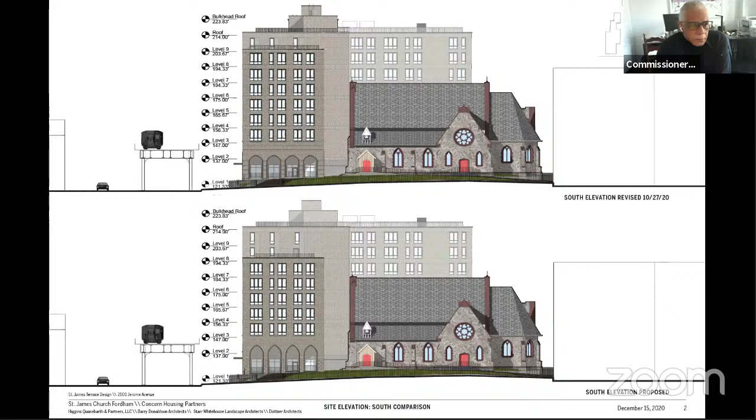Applicants have joined the hearing meeting. Please state your name for the record and you may begin. Good morning, Commissioners. Ward Dennis with Higgins Quasebarth and Partners, representing St. James Church and Concern for Independent Living, the applicants for this project.

As Corey outlined in the prior public meetings, just as a reminder, this is a project that proposes a new apartment building at the north end of the church site. The apartment building will be 50% affordable and 50% supportive housing, and the new construction will include new facilities for the church, which in effect create a campus or close at the north end of the church.

Which is entered through this arcade at the base of the building. At the last public hearing, the commissioners asked us to reduce the height of the south wing from 8 stories to 7 stories, which is what you see here, and reconsider the design and detailing of the arches for the arcade to make them more true Gothic arches. We have done both of those, and made some additional revisions and refinements, which I will take you through.

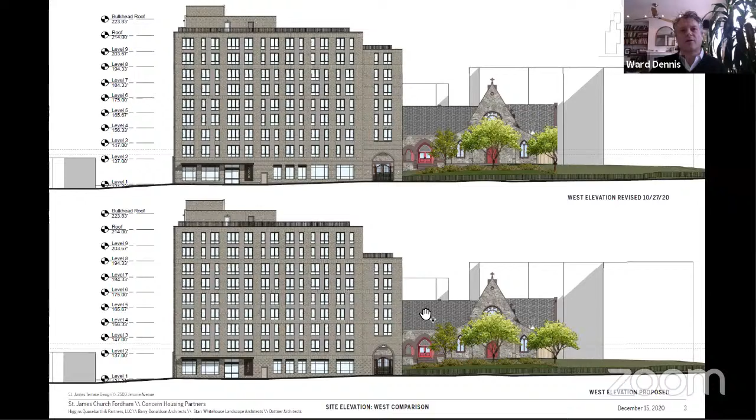You will see in a few moments that we have also revised the brick patterning at the base of the building to create a more rusticated brick pattern that ties the whole lower section of the building together. We have also brought this brick patterning around to the north elevation.

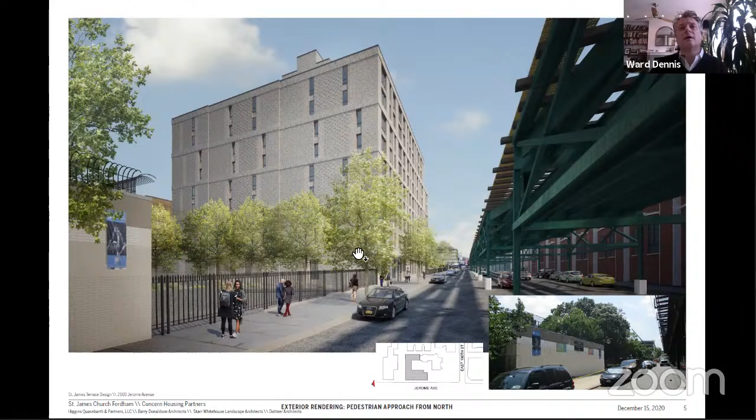Going to the new building itself, to the south wing, we have revised the Gothic arches. It is now a true Gothic arch, modeled after the arches on the church. We have also modified the proportions of the openings so they fit within the parameters of the Gothic style. This results in a slightly taller 19-foot opening and a slightly narrower 10'4" wide opening on this west elevation, this being the main entrance into that north campus or close of the church, where all of the church's social programs will be located.

We've adjusted slightly the design of the gate. This is still based on the historic gate that exists at the south entrance to the church. And as I mentioned, we have modified the brick detailing at the base of the building.

We're using these projecting header courses with gray colored brick, which creates a more rusticated pattern. And as you'll see when we get into the arcade itself, this creates a very nice relationship between the brick on the new building and the field stone in the historic buildings.

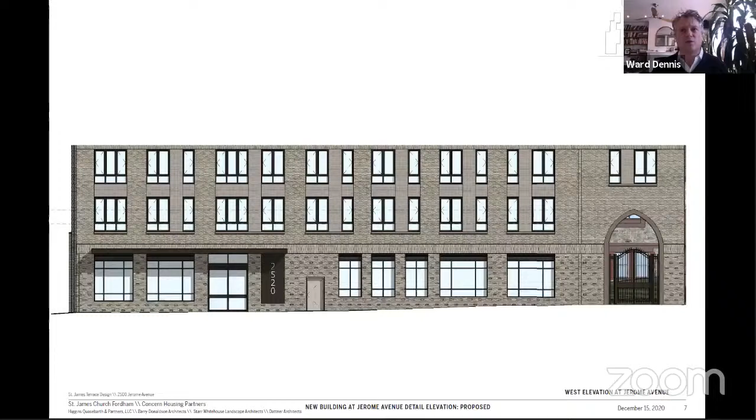We also have this three-course high soldier course of brick, which creates a water table around the base of the building. It hits the arches right at the spring of the arches. If you note here on the overall elevation on Jerome Avenue, it ties in nicely with the height of the canopy at the main entrance, so the soldier course and the rusticated brick create a unifying motif around the base of the building.

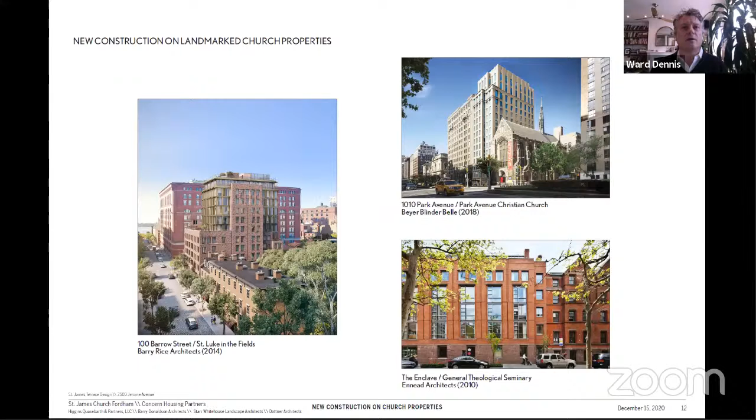This idea that the city has grown up around these older churches is something we see throughout the history of the churches, and we also see that the churches themselves are often involved in the growth of the city around them. The commission itself has embraced this idea with many of their prior approvals for new buildings next to churches throughout the city, and these are just a few examples that we had shown previously.

So in terms of appropriateness for the new building, based on the history of the church's development and the history of the city growing up around this church and around churches in general, we do believe that this project is appropriate on the architectural merits.

I'm going to take you through a series of renderings walking around the church. These are the same renderings we viewed before. We do have a before-after comparison in the appendix, but we thought it would be useful to take you through the whole sequence without breaking up before and after.

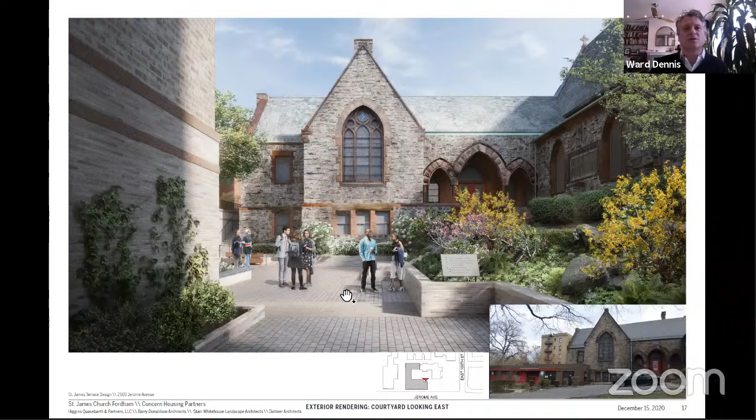And then as you come out into the courtyard, you really get this, what I think is a magical moment, where the church and the parish house reveal themselves, and you experience the overall complex of the site. You really start to see that this courtyard becomes another room of the church itself. This is a view looking east.

Straight ahead at the ground floor is the new fellowship hall of the church. To the right, that single-story building is the new community center, where the church's social programs and other programs will take place. Looking back from north to south, towards the church and parish house on the left, you still get a sense of how this becomes another room for the community, for the church,

outside the community center and the fellowship hall. Note on the center left here, the stair that separates the parish house and the community center. And just as a reminder, this corner of the parish house is currently covered over and largely demolished as part of the construction of the 1950s fellowship hall. That will be part of the restoration of the parish house that is part of this overall program.

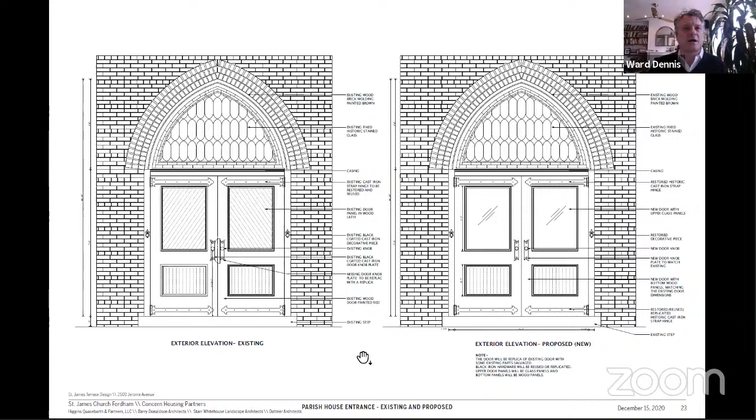All of the existing hardware on the doors will be reused. Some of the hardware is missing, and that will be replicated to match the historic as part of this project, which is really about opening up the parish house to the community. And then finally, on the stained glass windows, we propose to remove the non-historic decorative stained glass and replace it with this lozenge leaded glass that matches what's in the transom and matches what's in the other window openings on the parish house.

So that takes us through the full project. If there are questions, I'm happy to answer. We also have representatives from the architect and from the development team who can also answer questions.

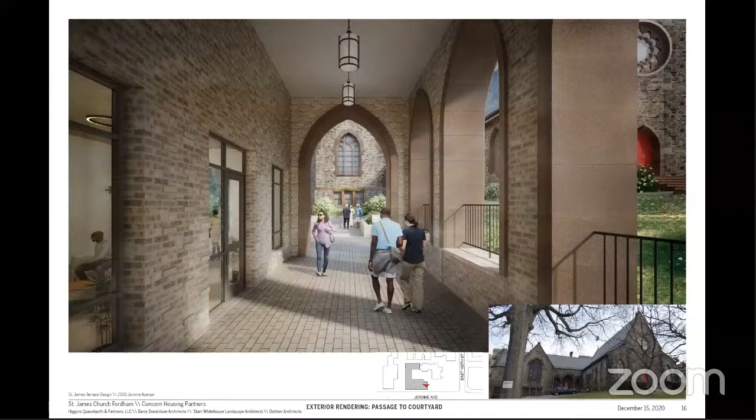Thank you. Commissioner Jefferson, I think last time you were supportive of a wing being here with arches, but you did want to see that wing returned to 7 stories. So today it has been returned to 7 stories and there have been enhancements at the base. I'm wondering how you're feeling now.

I can support this proposal for many reasons, one of them being the composition. I think it works very well, and although it's connected to the church, the church is still dominant from all views. Second, I think the circulation through the arcade is quite beautiful - it's classical and works very well. The materiality and the changes in material really tie this together in a sophisticated way, especially at the pedestrian level, and it holds it together. Finally, the repetition of elements - the arch openings - ties the base level together. So there are 4 or 5 things that are very well handled here, and lowering the building to 7 stories works very well. So I can approve it.

Okay, thank you. And Commissioner Holford-Smith, I think you were one of the commissioners who wasn't quite there yet last time. So I wanted to hear how you're feeling after these changes today.

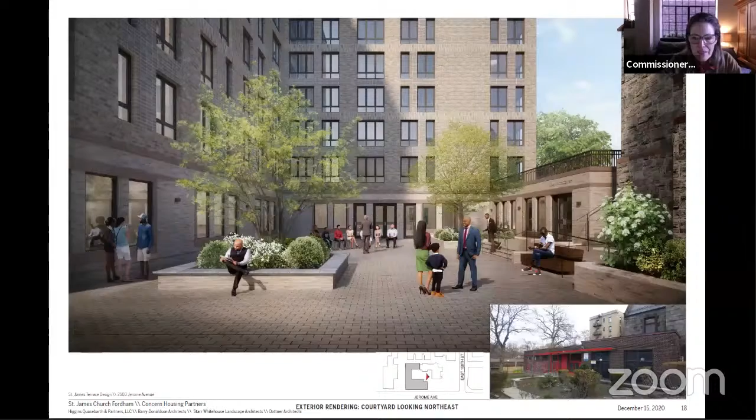That's the one on the southern side of the arcade, where there are the arched windows - I believe it was page 10. Basically the height of the windows in the drawn elevation, that one is fine, but it kind of lifts up to accommodate the slope in the ground, and I think that's a bit awkward.

I'm actually sitting here right now looking at Calvary, and there's something about the abstraction of the arches in the roof, at the penthouse level, that reminds me I think this would be more successful if it was a true sort of window - picking one of those datum lines, the higher one potentially or the lower one - allowing people passing through the arcade to read the slope against the arches or not, or to see it as a different kind of sloping condition beyond. So I think this is a bit awkward and could be resolved better, but otherwise I'm absolutely now in support of what they have proposed.

Commissioner Chen, last time you were sort of on the fence. Where you are now?

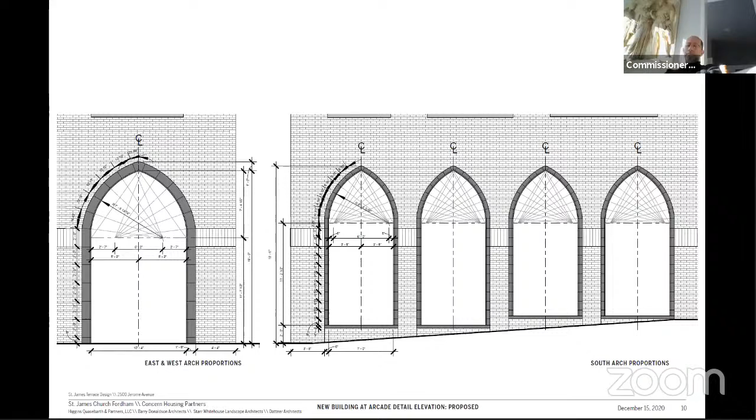Yeah, as you know, I was one of those that's struggling as well, and I agree with all the comments made this morning. I think collectively, this commission, together with the public comment and the feedback, and the applicant's modification, has vastly improved the thing.

I do agree with Commissioner Adi's comment that those windows that are not in alignment need further study. That I do agree. But in terms of detailing the proportion, I mean, it is what it is. This is a very tough site because you've got the physical constraint of a very important church building and landmark, and then to put it down in context, I can support it given the refinement.

Okay, thank you. All right, and Commissioner Goldblum, you had very strong feelings about the overlap at the parish. I'm wondering where you are now.

Yeah, thank you. I certainly agree that the demolition is appropriate. I certainly agree that the construction of a new building on this site is appropriate. I agree that the north wing has improved and its north-facing facade is appropriate. I remain opposed to the wing that blocks the parish house. I think it's standard LPC practice to try to preserve views from the street of significant portions of buildings, and I don't see why this would be any different.

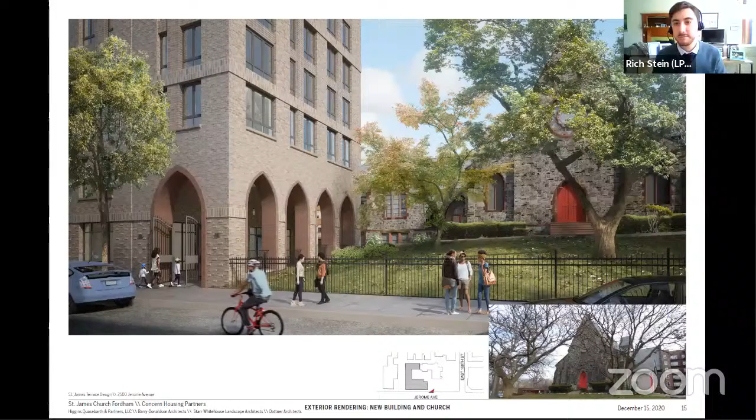Okay, so that's approved. Thank you, and thanks to everyone for participating in this robust process.

Okay, we're now going to move to public hearing items before returning to a couple of meeting items at the end of the day. So the first public hearing item is item number 1. This is LPC 20-10489, an application for a certificate of appropriateness in the Borough of Brooklyn, block 2566, lot 14, 98 Milton Street

In the Greenpoint Historic District. This is a frame house built in 1855. The application is to alter the primary facade and construct a rear yard addition. Commissioners, the applicants have joined the hearing. Please note that staff will be walking you through the components of the proposal, and the applicants are available for questions afterwards. Staff, you may begin.

Good morning, commissioners. Dena Tasse-Winter, preservation staff. There's some construction going on next door, so I apologize in advance if you can hear that. The item before you is 98 Milton Street, a frame house located between Manhattan Avenue and Franklin Street in the Greenpoint Historic District. The application is to install a portico and balustrades at the primary entrance and stoop and to construct a rear yard addition. Commissioners will note that the primary facade has been extensively altered over time and that the applicants are proposing staff level restorative work at this facade, including reintroducing clapboard siding, a cornice, multi-light windows, wood window surrounds, and so on.

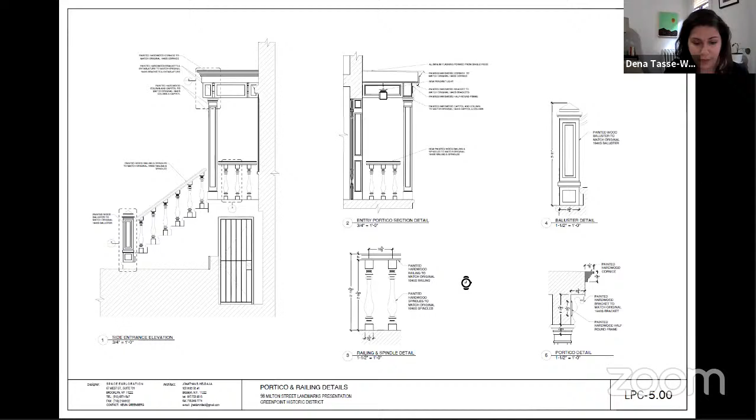These existing and proposed elevations, again, show some restorative work that will be at staff level, but I'm drawing your attention to the door surround. Here are the details for the proposed portico and railings. And this axonometric view, which is showing the proposed conditions, as well as a preview of the rear facade, which I will now review.

The proposed one-story rear yard addition is only being brought forth for your review due to the fact that fewer than 50% of buildings of a similar type along this block currently feature rear yard additions. Of the additions that are currently present, all are between 1 and 3 stories in height and project varying depths into the existing rear yard. The proposed addition at the subject premises will be 1 story in height and will have a shallower projection into the rear yard than the majority of others within this donut.

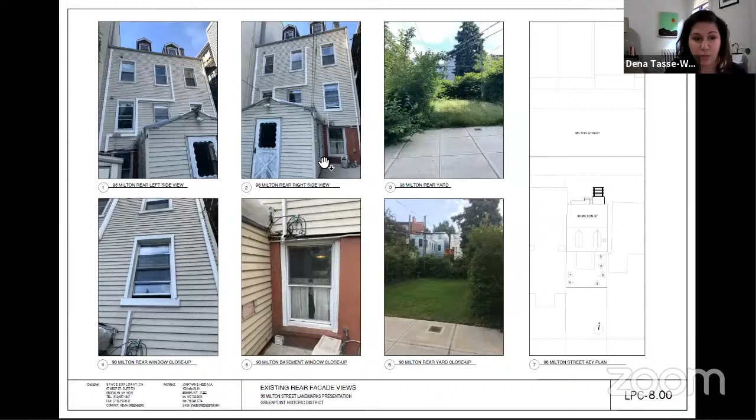Also, due to the size of the house and its placement within the lot, as you can see, the new addition will not project further than the neighboring buildings on either side. This shows the existing shed that will be removed, and the 1-story addition will be in this location. While the second floor and the pitched roof are partially visible from Noble Street, the 1-story proposed addition will not be visible from any public thoroughfare.

Here are the existing and proposed rear elevations. The addition will feature clapboard siding, metal window and door assemblies, and a terrace railing and stair. The enlarged door opening that you see above is also staff level work. And then here, just this axon showing the full scope of work and some existing and proposed views, again, showing the full scope.

So to summarize, the components before you today are the installation of the portico and balustrades at the primary facade and the construction of a 1-story rear yard addition. The applicants are here to answer any questions. Thank you.

Thank you. Nice presentation, Dena. Commissioners, do we have any questions for either Dina or the applicants? All right, I'm not seeing any questions at this time.

So why don't we see if we have any public testimony, and then we can come back to that. If you're here and would like to speak on this item, please raise your hand so we can identify you. And as always, we'll start with anyone who signed up in advance, and I'll turn it over to Lisa Kersavage to walk us through the testimony. Great, thank you, Sarah. We had 2 people sign up, and we'll start with Kelly Carroll, followed by Mark Bench. So Kelly, I've brought you in.

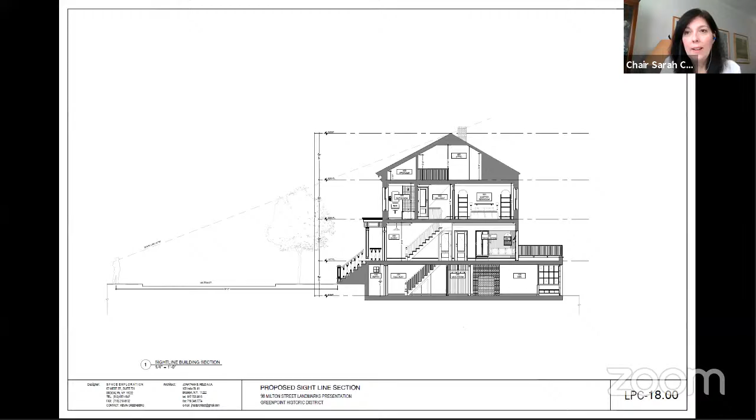So if the applicant is present, can we have them unmute? We are present, there's three of us. Okay, and we're happy to answer any questions. We're delighted to hear the testimony from the two testifiers, and we're very grateful to the commission for its attention this morning.

Great, thank you. And I just had one question. It's a very detailed question, but at the front portico, your columns are set in and the entablature sort of goes beyond it. I'm just wondering, is that typical? I imagine these being, in my memory, typically aligned with the entablature and not set in. I don't know if you thought about that detail or made that decision purposely.

I think that decision was made based on precedents we saw in the district, but we're happy to modify the proportions if the commission deems it more appropriate to do so. So did you see others where the columns were set in? I believe so. I think in the precedent images that Dina walked us through in previous pages, it looks like one of the images we included had a similar entablature relationship. There it is. I see it. 102 Milton.

Sarah, just for the record, I believe that building referenced there is one that was restored at some point in the past, not an original portico. So it may or may not be replicating authentic details in that particular case. Okay, thank you.

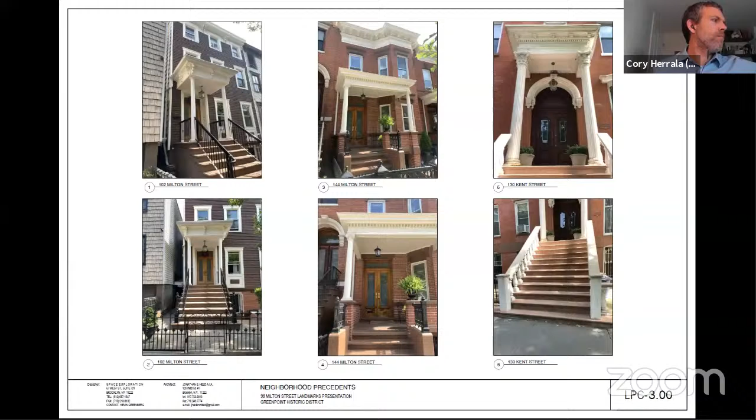Just an alignment question. If you go to your back facade elevation, you see the alignment of the second floor and the windows on the third floor, and the cluster of windows that you have don't align with the ones on the third floor. I'm just wondering why is that? Is it just because of the space inside, or is it a design issue?

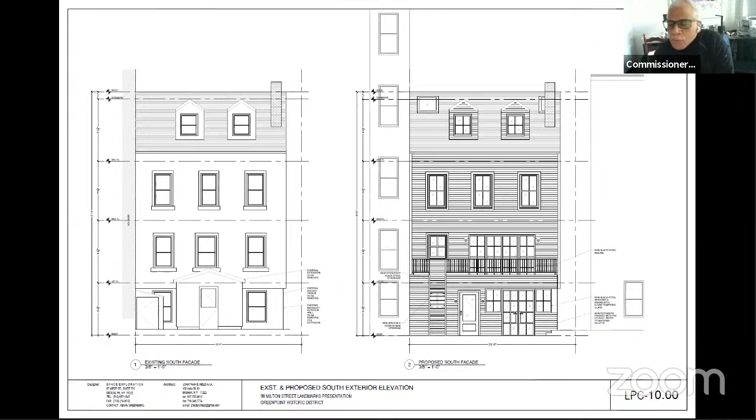You're correct, Commissioner, it's dictated by the interior layouts. Given the modest size of the interior spaces, the proportion and alignment of these two clusters of windows are driven by the interior layouts. And just confirming that the rear facade is not visible from any public way, is that correct? Correct.

All right, any other questions? Okay, I think we don't have any other questions, so I'm going to go ahead and start to unmute everybody so we can close the hearing and begin our discussion.

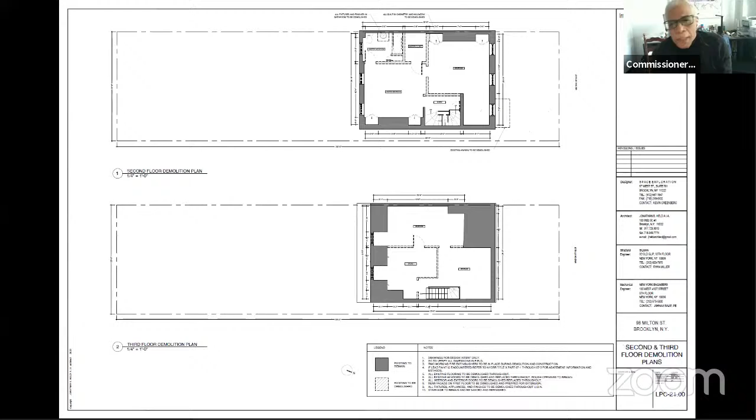Commissioner Chapin, would you make a motion to close the hearing? Motion to close the hearing. Commissioner Bland, would you second that motion? Second. All in favor, say aye. Aye. Any opposed? Okay, the hearing is closed and we'll begin our discussion.

So we have two components. One is the creation of the portico and alterations to the front entrance, and the other is the one-story rear yard addition at the rear. Commissioner Devonshire, would you like to start this one?

I will, and I think that pretty much everything is appropriate about this. I applaud the applicant for turning this building around, and I would also say that the discussion about the portico is correct, and there's probably enough information, both written and pictorial, to find an accurate historic reproduction of this. I think Corey said it well, that the one they used as an example is probably a recreation. I would say work with the staff and develop a portico that's accurate.

Commissioner Chen? Yeah, I agree with Commissioner Devonshire. This is appropriate and I can support it. Commissioner Bland? Agree, a great project actually. Just work with staff, particularly on the front entrance.

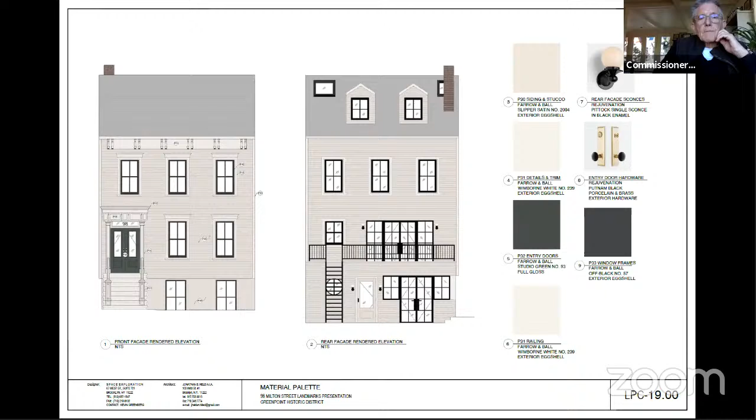Chair Carroll, Aye. Commissioner Bland, Aye. Commissioner Shamir Barron, Aye. Commissioner Chapin, Aye. Commissioner Chen, Aye. Commissioner Devonshire, Aye. Commissioner Goldblum, Aye. Commissioner Gustafson, Aye. Commissioner Jefferson, Aye. Commissioner Lutfy, Aye. Commissioner Holford Smith, Aye.

Okay, 11 in favor and none opposed. The motion carries. It's approved, and just continue to work with the staff on resolving the proportions of the portico. Thank you very much.

Thank you very much, thanks to all of the commissioners. We'll move to the next item. The next item is number 2, LPC 21-00136.

An application for a certificate of appropriateness in the Borough of Brooklyn, Block 1222, Lot 7501, 875 St. Mark's Avenue in the Crown Heights North Historic District. A Romanesque revival style row house designed by Langston and Dahlander and built circa 1891. The application is to legalize facade work and the installation of a mailbox in non-compliance with Certificate of No Effect.

16-7468. Commissioners, the applicants and staff have joined the hearing. Please note that staff will be walking through the components of the proposal, and then the applicant will explain further details. Staff, you may begin.

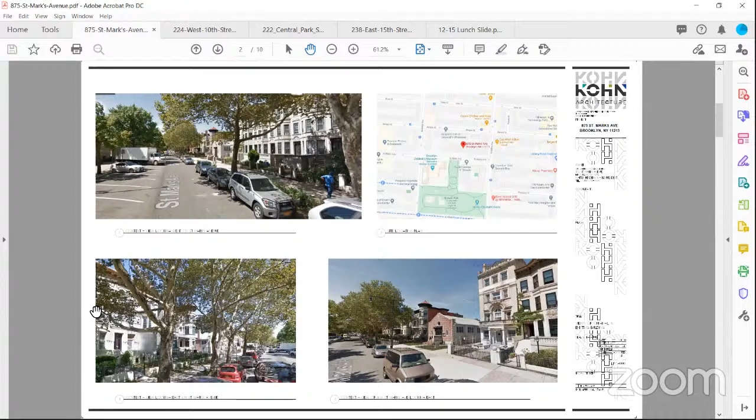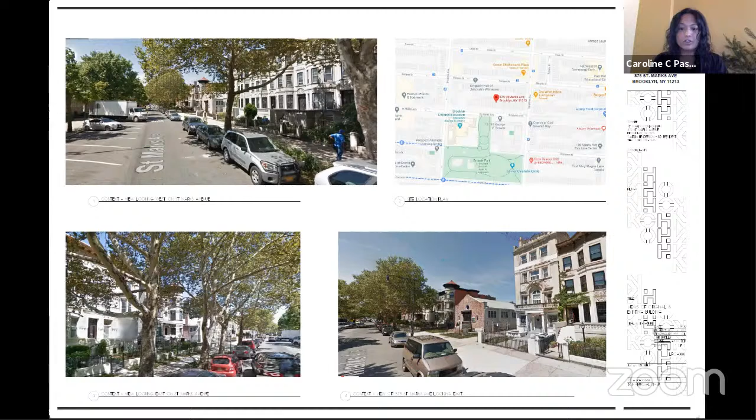So in 2014, several violations were issued against the property for work performed throughout the building without Landmarks Preservation Commission permits. This included alterations to the 3-story and 2-story projecting bays at this east facade, including the removal of the decorative pressed metal elements, pilasters, and molded panel details, cornices, and other architectural elements that were present at the time of designation. These bays were completely resurfaced in stucco.

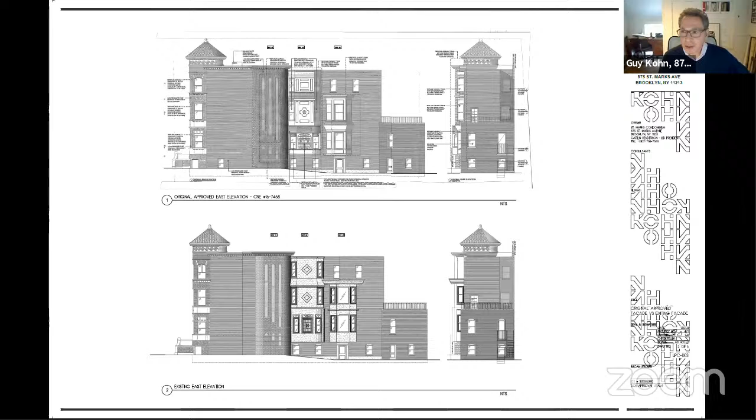We have worked with Landmarks and the staff to resolve all of the violations except for the projecting bays and mailboxes. Instead of having to destroy the existing projecting bays, which still have their same form in essence, we tried to find a solution that would work as far as disturbance to the building and their financial capabilities. The decision reached in conjunction with landmarks staff was to try and replicate the details of the bays in stucco rather than rip out what was there, rebuild them, and duplicate the materials. The other problem was we had no real good photographs of the detail work.

We were able to look at it closely, as close as I could, and I think the first bay, call it bay number 1 on your left of the screen, is very close to what we can see from the photographs that were there.

So we're asking to try and duplicate these details, including the fish scale metal roof, the framework, and some of the pilasters on the lower level. We're suggesting using fiberglass to replace the pilasters, and we believe we can duplicate most of these details with stucco. There are some lunettes we're proposing putting over the existing arched windows, and that would probably be done with wood.

On the second bay, it's very hard to see what was there originally. The cornice at the top is existing, and we're proposing keeping it there and doing the rest of the work with stucco, including the fish scale roofs, the arches, and some of the brackets underneath the sills. If I can go to the next slide, Caroline, and show the details.

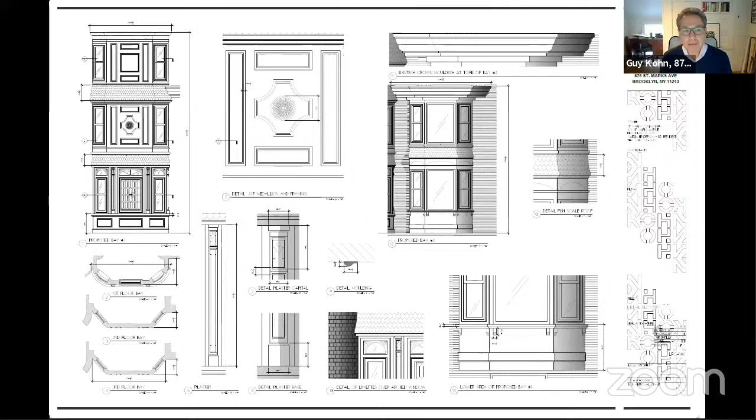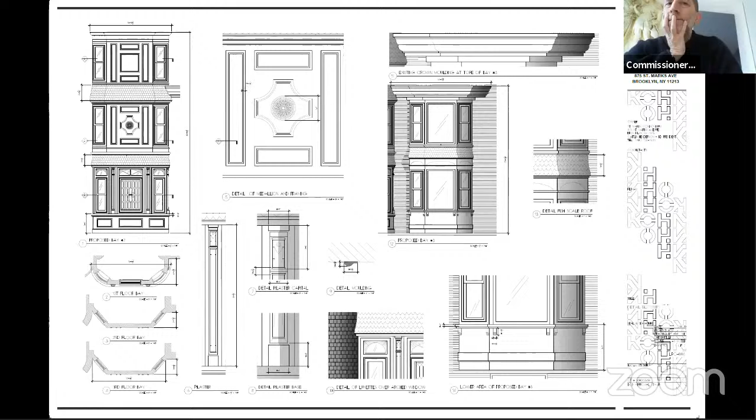Well, we were trying to make it as simple in installation as possible. There's so much stucco work on these bays that we thought it would be advantageous to have just one person, one company work on that. I think you can develop some of these forms fairly easily. I imagine this fish scale stucco to be almost like marzipan, where you layer upon layer to create that effect. The fish scale, from what I can see, is a very flat pattern, not curved or rounded like on a snake. It's laid on, almost like a baking sheet. We also felt stucco was probably the most cost effective in this particular case.

Go figure. Thank you. Any other questions? Okay, I think we might not have any other questions at this moment.

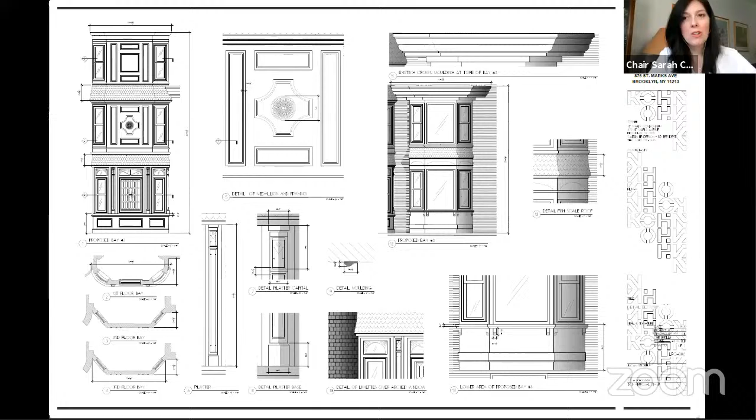So we will see if we have public testimony. If you're here in the meeting and would like to testify on this item, please raise your hand so we can identify you. Caroline, can we move back to the slide with the Zoom meeting information for the public? I'll turn it over to Lisa to see if we have any testimony. Lisa? We didn't have anybody sign up, and I don't see any hands raised. All right, okay, thank you.

Rich, do we have any written testimony? We just have a resolution from Brooklyn Community Board 8 recommending approval. Okay, thanks.

Any other final comments, Mr. Kohn, that you'd like to make before we close the hearing? I think that's about it. Thank you. Okay, all right. And commissioners, no final questions, right?

I am in the process of starting to request to unmute you all so that we can close the hearing. Commissioner Holford Smith, would you make a motion to close the hearing? Motion to close the hearing. Okay, and Commissioner Lutfy, would you second that motion? Second. Great, all in favor, say aye. Aye. Aye. Any opposed? Okay, the hearing is closed.

So we have this application before us to actually modify work that was done in non-compliance. We issued a permit for corrective work, and that work was done in non-compliance. Primarily, we issued a permit for replicating the bays in metal, but they were resurfaced in stucco. So the application today is to modify that work in non-compliance to try to replicate details in stucco, keeping it a uniform material. These bays are architectural features on a secondary facade that is seen obliquely, so that's something one can consider as well.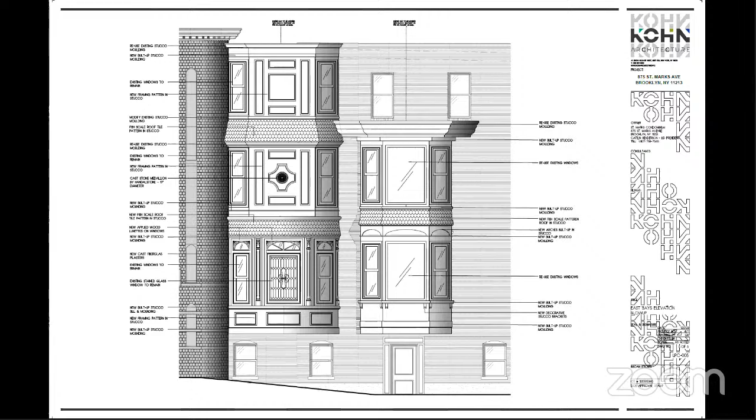Okay, Commissioner Chen. I sort of agree with Commissioner Goldblum. I think they need to work with the staff to make sure of the best material for it and follow up.

Commissioner Bland. Well, to complicate it, I'm with Devonshire on this one. I think it should go back to what was originally approved. Although I have admittedly seen some incredible stucco work on Queen Anne style newel posts in Brooklyn Heights, which surprised me. So maybe it can be done, but I think it should be metal.

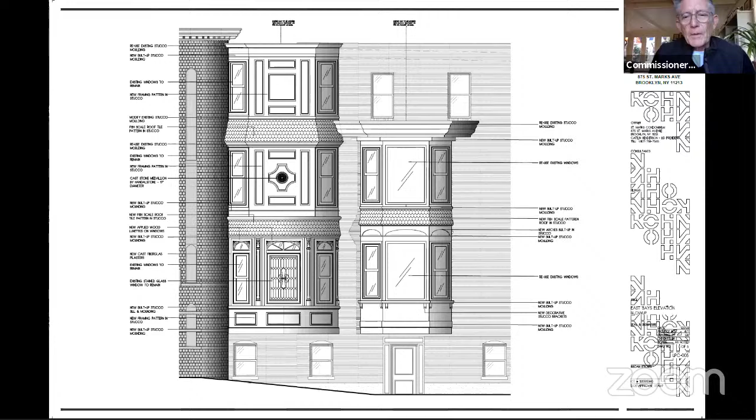Okay, and also I just remember to comment on the mailbox as well. We have to address that in the areaway. I can accept the mailbox as a freestanding item, separate from the house. Okay, and Michael, or both Michaels, do you want to quickly go back to the mailbox? I'm okay with the mailbox, Sarah. Okay, me too, same here. Okay, great. And Commissioner Lufty?

I have to say I'm concerned about the durability of the stucco, and I think metal would be my first choice. But if there's another material, possibly fiberglass, that would have more durability, I would recommend that. So no, I couldn't have this. And I'm fine with the mailbox.

And Commissioner Jefferson? I agree with Commissioner Devonshire, and I'm fine with the mailbox.

Commissioner Shamir Barron? Oh, she had to step away. Okay, Commissioner Holford Smith?

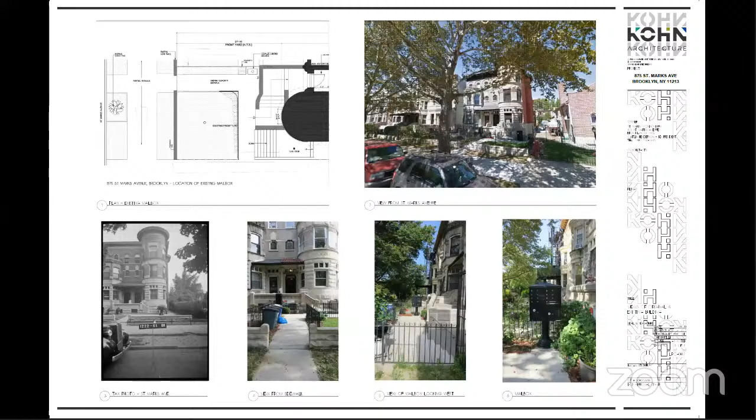And I recommend approval of the mailbox, finding that the freestanding installation of the mailbox did not damage any original or historic fabric at the areaway, that because of its location adjacent to the stoop and set far back from the street, the mailbox does not call undue attention to itself when seen in the context of this landscaped portion of the front areaway, and that the presence of the mailbox does not detract from the architectural character of the building, the streetscape, or the Crown Heights North Historic District.

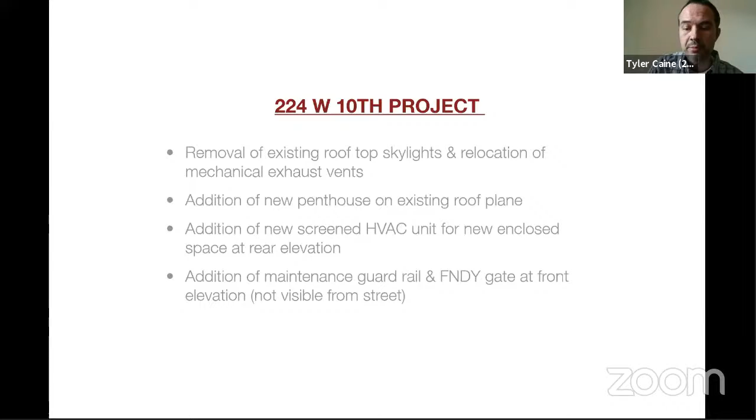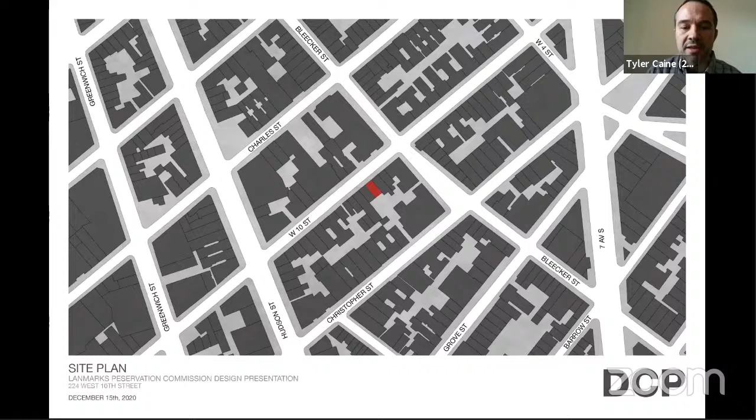Just to give you a little bit of background about the site, you can see we are located in the middle of the Greenwich Village Historic District. To zoom in a little bit to our block, we are on the north side of the block on West 10th. Between the back side of the block is Christopher Street, and this exists between Bleecker Street and Hudson on the east and west.

The site in question, this row house was built along with its neighbor in 1848. Then in 1926, there was a significant renovation done to turn this into a multifamily building that included the removal of the front stoop and the first floor entry. There were also changes to some of the windows and the addition of a fire escape. In 1969, this was included in the Greenwich Village Historic District.

Then in 2010, there was a renovation and restoration done to this townhouse. Maybe some of the commissioners here today were part of that approval, that restored the front facade and used the neighboring 226 as the guide for how to replicate the entry condition, restore the front stoop and railing, and add new windows, along with the restoration of the cornice condition.

So this is what we see here today. The brick on the front elevation is original to the building, and then most of the other details were restored as part of that 2010 renovation.

On the rear elevation, what is existing today is white painted brick. The openings on the upper stories are original to the building with replaced windows. The openings of the lower first floor and garden level of the building were expanded as part of the 2010 renovation, along with the addition of a metal rear porch and railing that goes out a few feet.

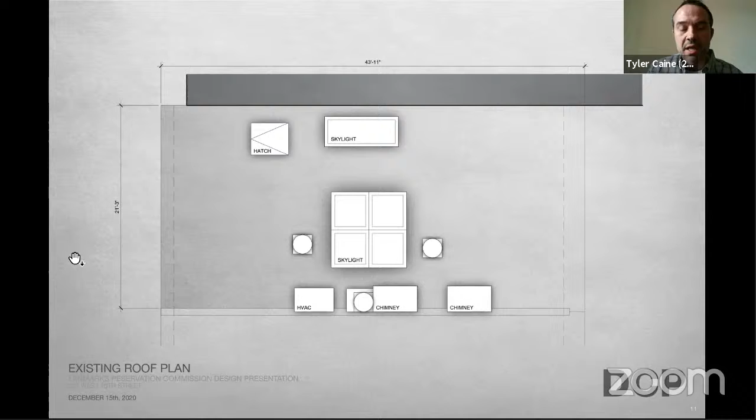So this is a roof plan of the existing condition. You can see these are the skylights and roof egress hatch that will be removed as part of this renovation. There are also two existing mechanical exhaust vents that will be relocated to accommodate the new layout. The existing chimneys and HVAC unit on the west side will remain.

This site section starts on the north side of West 10th Street, goes through our site and the existing row house. You can see it has a single sloped roof from front to back, cuts through the rear yard, and then through that incidental gap between the two buildings on Christopher Street. So there is some view through that gap to see the rear portion of what we are proposing.

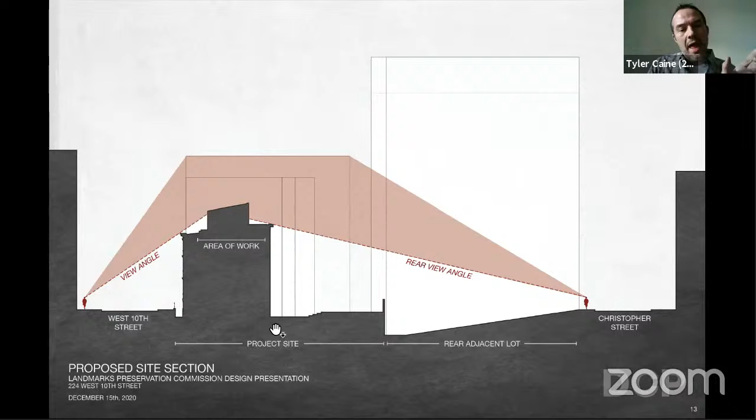The main concern, of course, is the view angle over the existing cornice that will remain of the front of our facade. So this is what we are proposing from a massing perspective. Our goal really was to try to minimize that area of visibility again from West 10th Street. And I can walk you through how and why that volume ended up in its current location.

This is a detail section of the top floor of the existing townhouse. So we can see the floor level with a staircase that is typical of the archetype. It's an open stair that goes all the way back down to the garden level floor. This is the top of the existing cornice that will remain. You have that single slope roof and then identification of that primary view angle, which is from the middle of the sidewalk on the north side of West 10th Street.

To begin, in order to provide roof access to the client for a rear terrace, there was a certain amount of overall rise that we had to accommodate. Even if we created the steepest stair that code would allow, it is a given height that leaves us at this level. The number of stairs also requires a landing. So in order to not intrude over the stair coming up below us and maintain the line of the stair opening below, we started our landing here and then went up to the roof.

Again, alignment with that opening was extremely important. We didn't want to compromise the integrity of the volumetrics on the inside of the building. So this was essentially providing us with the location for the interior face of the north wall of the penthouse addition. Combined with that is the minimum DOB allowed head height clearance on a stair in the 1968 code, which is 6'8". That was also reinforcing this location for where we would need to put the wall above and cut that floor in order to provide occupiable access to this new roof structure.

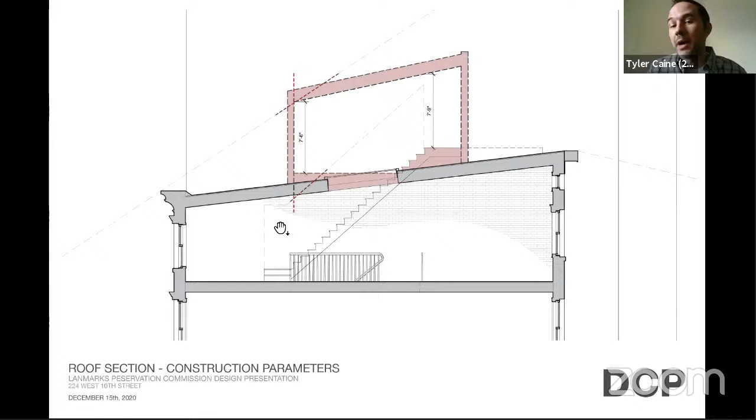Those things together were combined with two other variables. One is our ability to shrink the size of the roof structure at this location to a feasible level that could be coordinated. The other was also a DOB criteria building code for what the head height of occupiable space is, which is 7'6". So those two things together created a staircase that came all the way up to a landing even with the rear terrace and steps back down 4 steps to the occupiable space of this penthouse condition. That left us with the 7'6" height after pulling the roof structure down as much as we possibly could in order to accommodate it.

What that's left us with is about 1'8" of visibility on the front side. And I can walk you through how that visibility has taken shape.

What you see out here again is that guardrail with FDNY maintenance protective rail. And this is the line of the terrace in the rear. We are trying to keep as many of these existing rafters as possible because they were replaced as part of the 2010 renovation. So they are new metal C-joists that are pocketed into the brick on both sides.

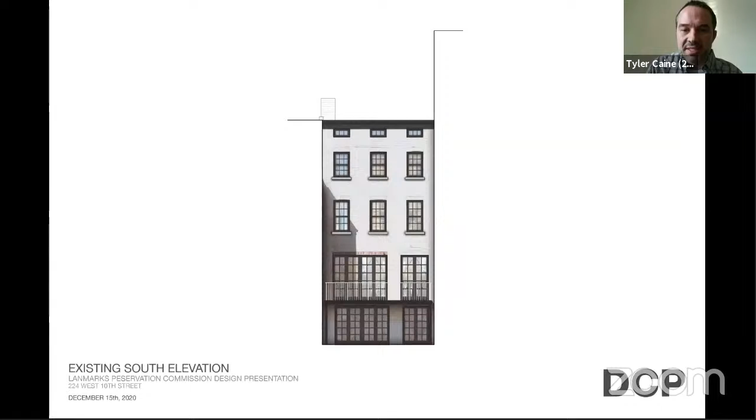Similarly, to look at the back condition, this is the existing, and then our proposed would match the white painted brick that is on the rest of the elevation on just this rear facade. We're also replicating the black painted metal handrail that was installed as part of the 2010 renovation on the porch, and we are employing the same door manufacturer for the blackened steel folded door system that constructed the doors as part of the 2010 renovation.

You will see just on the left a small wood screen that would screen the mechanical HVAC unit that's on this side. That HVAC unit is really just to provide tempered air for this new space.

So to walk you through the mock-up that we have installed, I would point out that we constructed a mock-up, and then once the mock-up was constructed, we looked for ways to continue to reduce visibility. Among them was working with a structural engineer to slim down the front construction of the north wall only from a 2x6 to a heavy gauge 2x4 stud, and that bought us 2 more inches. So we reconstructed the front of the mock-up to move that back, which I think did even continue to help on visibility.

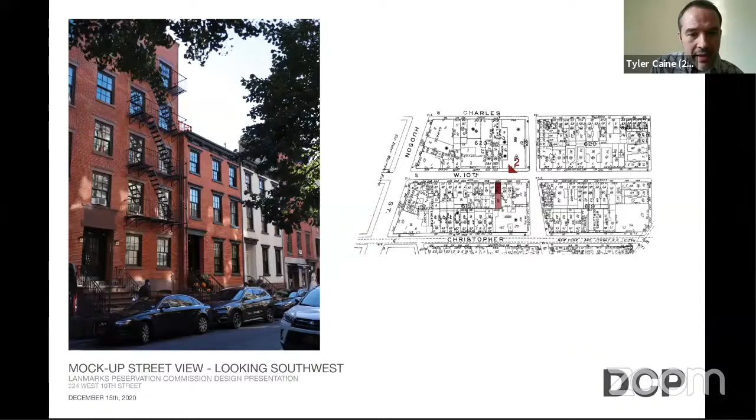Moving to the front elevation, there is that strip of 1 foot 8 inches that goes across the front of the elevation, and as we continue to move down, that strip of visibility remains relatively constant. Then as we move down towards the police station, there is one more sliver of view before we get eclipsed by the taller building to the east of us and associated tree cover. There is no visibility from the corner on Hudson Street.

To walk through the materiality of the whole composition, as you can see, most of the materials here are already existing. On the front elevation, the existing front brick, the black multi-light windows, the black painted wood trim, and the existing brownstone are all existing to remain. We are not proposing any alterations to the historic and designated facade.

What we are adding on top is that staggered standing seam patinated zinc material, along with the blackened steel of that window that would provide access for maintenance.

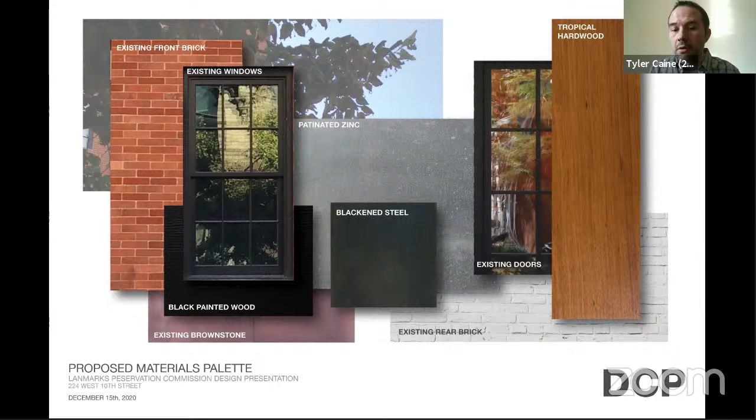Similarly, on the rear elevation, the existing white painted rear brick would be replicated on the rear face of our addition, as well as the material and manufacturer of the existing doors would be replicated for the terrace doors at the top. The only location of this tropical hardwood would be the screening of that mechanical unit, and we would allow that to weather over time, so it should provide a gray tone that would complement the rest of the relatively neutral tones.

Just to end, I thought I would walk around some other aspects of the district, which I think ground our project. I'm not going to go through all of these, but I think there are numerous examples of a small, minimally visible addition onto similar massings of 3 to 5 story row houses around the district.

Just to touch on some of them briefly, there's one on 11th Street. We see a rooftop structure that provides similar amounts of visibility to, I think, what we are ultimately proposing.

A better example might be just next door on 11th Street. Even though this is a double wide row house and ours is a single wide, the composition and materiality is very similar. And I took something just from the designation, or the certificate of appropriateness back in 2017, that said the modifications to and expansion of the rooftop addition will not eliminate any significant architectural features of the building.

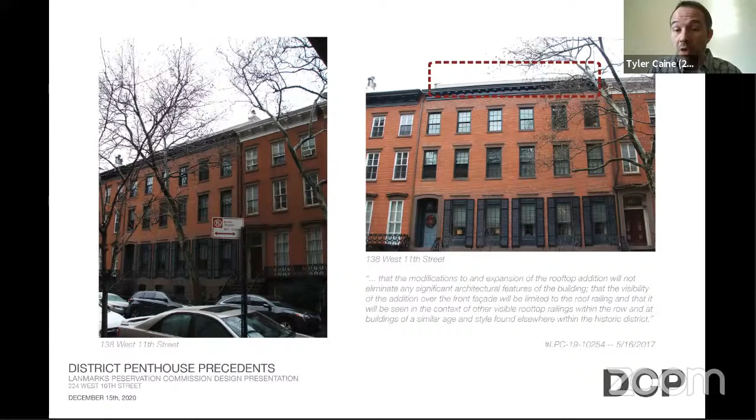I think that's really what we are also trying to do. I don't think anything that we are proposing is compromising the integrity of the base row house condition on the front. And then the last example is actually one block up from us on Charles Street.

They chose what appears to be a patinated copper, whereas ours would be a smaller scale patinated zinc. But I think this again speaks to what our goals are in trying to situate this within the district and accommodate the penthouse with minimal intrusion. And this is kind of just one block away.

That was it. Thanks again for letting me share the project, and I'm happy to answer any questions that anyone might have with the proposal. Thank you. Thank you. All right, commissioners, do we have any questions?

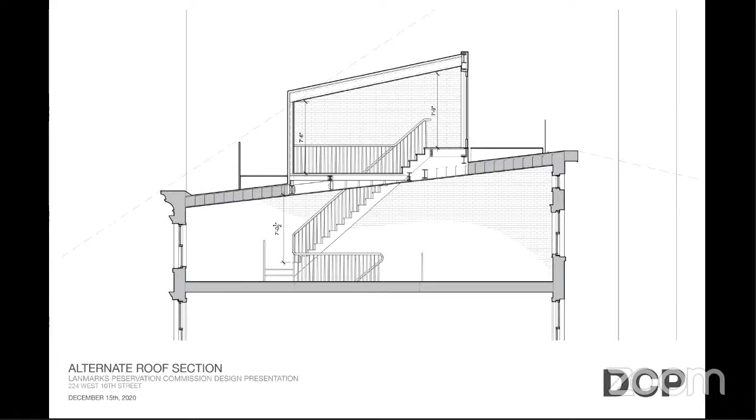Thank you. And just a follow-up question to that, because I think you showed really very clearly why you were sort of limited to this footprint, and that you have these minimum floor to ceiling heights in order to meet the landing points that you would create at the roof, given this very steeply pitched existing roof.

We've seen some applications where the addition has sort of been dropped down into the floor below to help get it out of the sight line. I don't know whether you considered that, or whether there just isn't enough room in the floor below to accommodate it. Exactly, I think we run into the problem of the head height issue. When you turn up this landing and begin to go, it really set that height in terms of coming back up, and also the continuation of the roof plane was something that both us and the client really wanted to try to maintain. So we squished down that structure, doing pretty much everything we could to sink the upper roof down into the addition as much as possible.

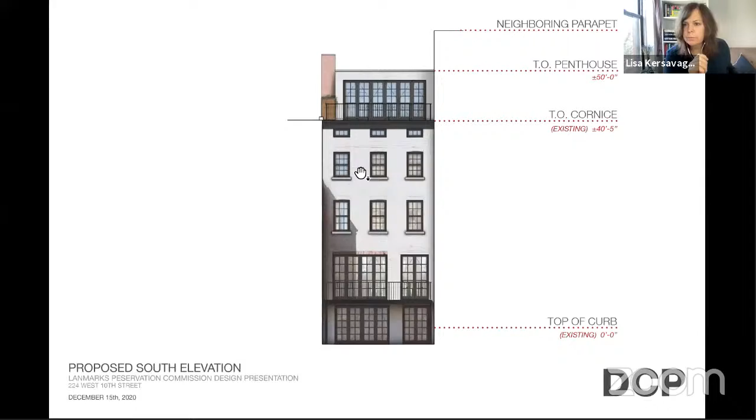Our committee reviewed this application, and some felt that the visibility of the rooftop addition from both the West 10th Street side and Christopher Street was a bit too great. They agreed with Community Board 2 that further effort should be made to reduce that visibility through modifications to the roof design and/or adjusting the roof angle.

I don't see any other hands raised. Did we receive any written testimony? We did receive that resolution from Manhattan Community Board 2 recommending approval, but to limit the visibility from the north.

So Mr. Kane, would you like to respond to that or speak a little bit more about the conversation at the community board? Certainly, I think we did bring up the conversation. The hesitation on our side is that the occupiable space in this addition is only 11'2". So modification to the front side of the roof below 7'6" would be removing anything that came below that as occupiable and usable space on the front side. Given the small amount of space we're working with to stick within this footprint, it seemed like removing 10 to 15% of the usable area was something we would like to avoid if possible.

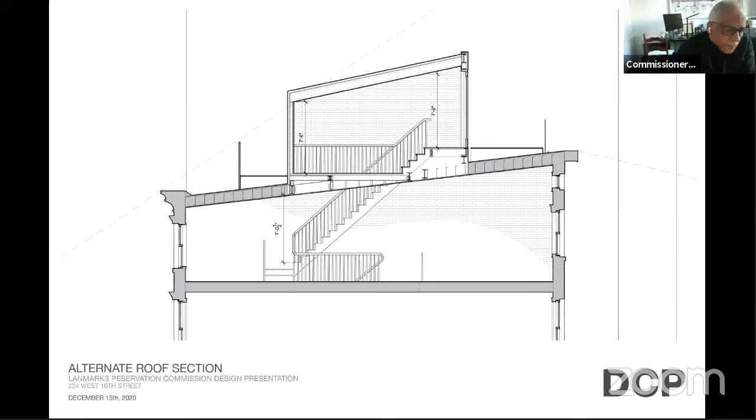Yeah, I had a question about the placement of the stair. From how you described it, there was a desire not to impinge on the existing opening for the existing stair, but you could in fact push the stair further—impinge on that opening slightly to push the addition so it was not visible from the street. Yes, I think push it back, basically. You mean towards the rear of the building? The rear of the building, yeah. I think we would only be limited by making sure we have the same degree of head clearance for the stair coming up underneath it.

Okay, thank you. Sure, okay. Other questions? Okay, not seeing any other questions.

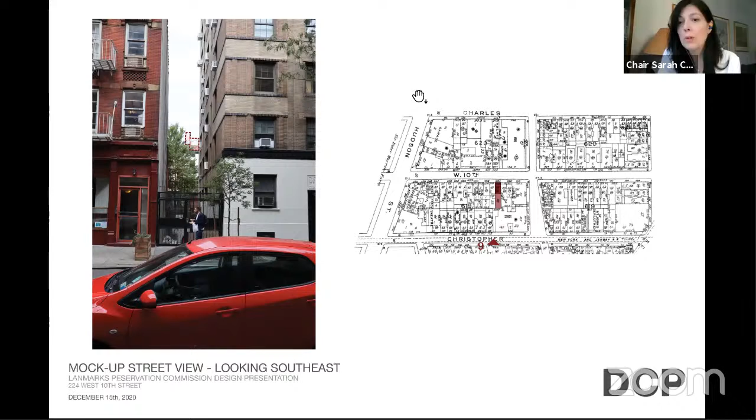I think we will move to close the hearing and begin our discussion. So I am now sending a request to unmute you all, please accept that. Commissioner Bland, would you make a motion to close the hearing? So moved. Commissioner Chapin, would you second that? Second. All in favor, say aye. Aye, aye. Any opposed? Okay, hearing is closed and we'll begin the discussion.

And Commissioner Holford Smith, would you like to begin this one? Sure. I think just given the scale of these, well, in this house, but two in a row, just having this little bit of visibility is distracting. So I think the applicant should try to do what they can to minimize that view. I think an addition could be approvable, but I'd like to see less of it from over the main facade. Okay, thanks.

Commissioner Goldblum? I was just scrolling to see something. Yeah, this is something of a self-imposed problem. I think they have been very scrupulous in trying to make their box as small as it could be. But in the end, if the terrace at the back—if you go to page 23 of 49, I guess it is, page 22 in their presentation—if you made the back terrace, instead of 7'11", made that 5 feet, and maybe had your front terrace be where you put your table, you could slide the whole thing. And this isn't about the stair—the stair need not be visible. If the stair had a sloping roof that followed the line of the diagram they showed a few pages up, the stair bulkhead itself would not be visible. Visibility is in the room created next to the stair. Yes, they've tried their best to hide it, but with some minor adjustments, this could be not visible, and therefore they should make those gestures to make it not visible. Okay, thank you. Commissioner Chapin, I skipped you, so why don't you go ahead?

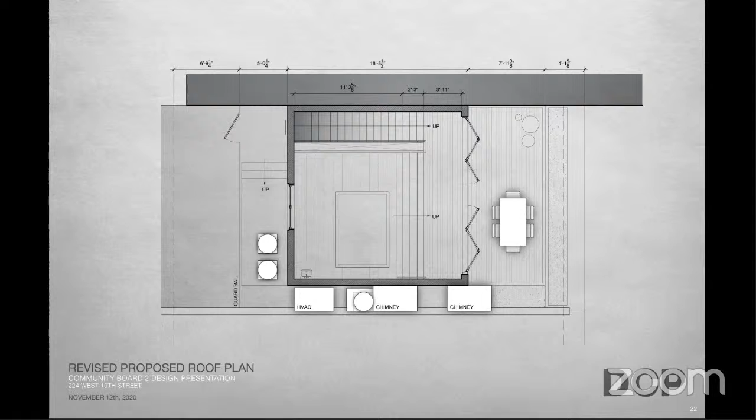I think I agree with the previous comments. The proposal is fine in general, but the visibility over the front facade is really not something we would normally approve. So they really need to work to diminish that.

Thank you, Commissioner Devonshire. I think it needs to be less visible when they've been given two ideas for doing that, and should follow through with that. Commissioner Chen?

I agree with the comments. Commissioner Bland? Agree, less visible. Commissioner Lutfy? I agree that they need to work on the visibility. Commissioner Jefferson? I agree with my fellow commissioners. Commissioner Gustafsson? Agreed. Commissioner Shamir-Baron? I agree, less visibility. Thank you.

I think everybody agrees that there could be a couple of things one could do to reduce the visibility, primarily over the front facade. So Commissioner Holford-Smith, would you make that motion?

Yes. In the matter of LPC 21-01582, 224 West 10th Street in the Greenwich Village Historic District, a Greek Revival style row house built in 1847-48. The application is to construct a rooftop addition. I recommend approval with modifications, finding that the proposed work will not damage or eliminate any significant architectural features, that the rooftop addition will be minimally visible from the west and from a gap in the street wall over the rear facade and at a distance from oblique angles, in the context of other rooftop accretions and secondary facades.

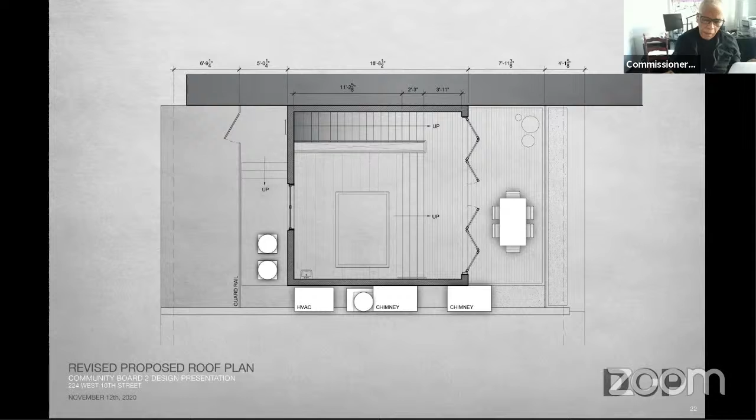However, I found that the addition and railing will be unnecessarily visible over the primary facade when viewed from directly across the street. Therefore, I recommend that the addition be restudied to eliminate visibility from across the street and directly over the primary facade.

Commissioner Goldblum, would you second that motion? I second the motion. Okay, and Rich, will you call the vote?

Chair Carroll, yes. Commissioner Bland, aye. Commissioner Shamir-Baron, aye. Commissioner Chapin, aye. Commissioner Chen, aye. Commissioner Devonshire, aye. Commissioner Goldblum, aye. Commissioner Gustafsson, aye. Commissioner Jefferson, aye. Commissioner Lutfy, aye. Commissioner Holford Smith, aye. Okay, 11 in favor and none opposed.

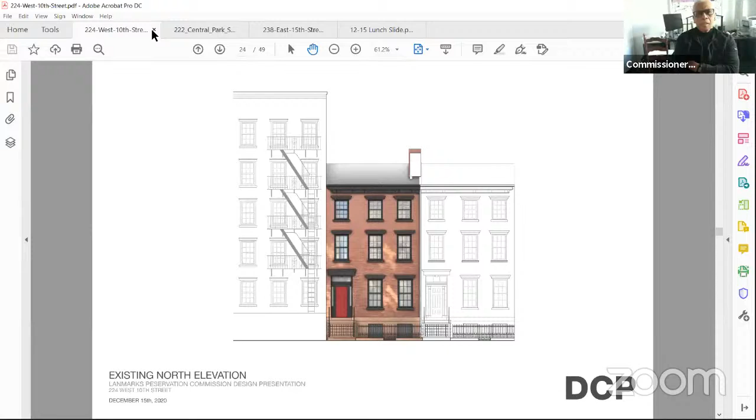The motion carries, that's approved with modifications. Please continue to work with the staff, and we'll move to the next item. Thank you very much. Okay, the next item is number 4, LPC 20-05605.

An application for a certificate of appropriateness for Manhattan Block 1030, Lot 46, 222 Central Park South, the Gainsborough Studios individual landmark. This is an artist cooperative housing building designed by Charles W. Buckham and built in 1907 to 08. The application is to replace windows.

Commissioners, the applicants and staff have joined the hearing. Please note that staff will be walking you through this proposal and the applicants are available for questions. Staff, you may begin.

Good morning, Commissioners. Elizabeth Diker, Preservation Staff. The individually landmarked 222 Central Park South features a variety of window types at the primary facade, including these large steel casement window assemblies that we see two at each floor. Many of these have been replaced or altered over time, as we can see in these elevations, noting the historic window configurations on the left and the existing window configurations on the right. Some of the historic steel casement windows do still exist at the upper floors, the details of which have been studied as part of this proposal.

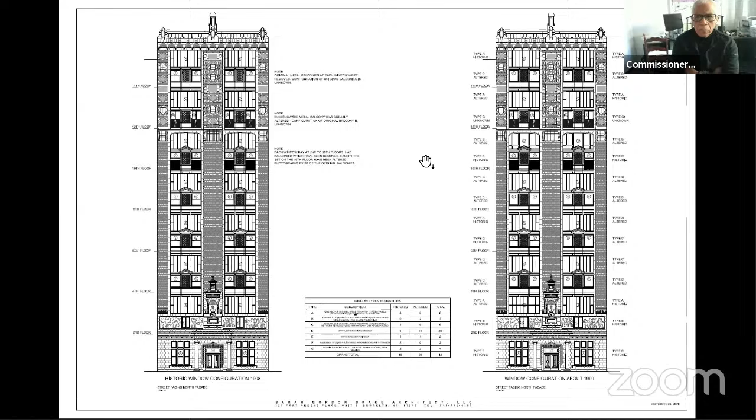The applicant team for 222 Central Park South is seeking approval for the installation of one new steel window assembly at the 4th floor that will match the original and historic steel windows in terms of material, configuration, and finish, with a slight adjustment in operation.

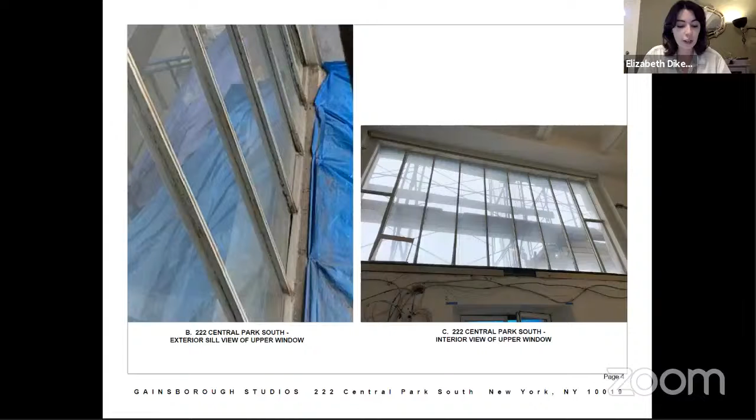Here we can see the existing conditions of the primary facade and the steel casement window to be replaced. Here we can see the interior of the 4th floor casement window and a detailed view of the exterior sill and window framing, along with more detailed photographs of the window framing.

Now we're going to get into the details of the existing and proposed windows. The proposed replacement windows feature a 3% loss of glazing from the historic.

Now we have the existing and proposed steel casement window elevations. While the historic windows feature double hung outer leaves at the ends, the applicants are proposing to change the operation of these units to outswing casement.

To mimic the meeting rail of the double hung window units, the applicants have added a horizontal muntin. In these final slides, we can see comparative existing and proposed sections and details.

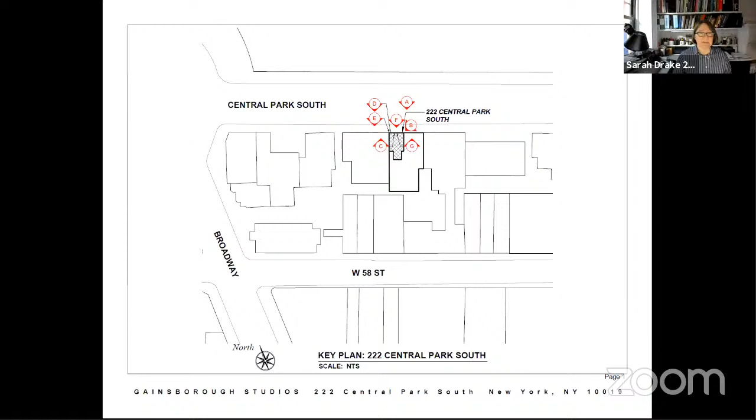And in terms of the suggestion to create a master plan, the building has agreed to develop it further, and this solution will be used anywhere else in the building where they change these windows.

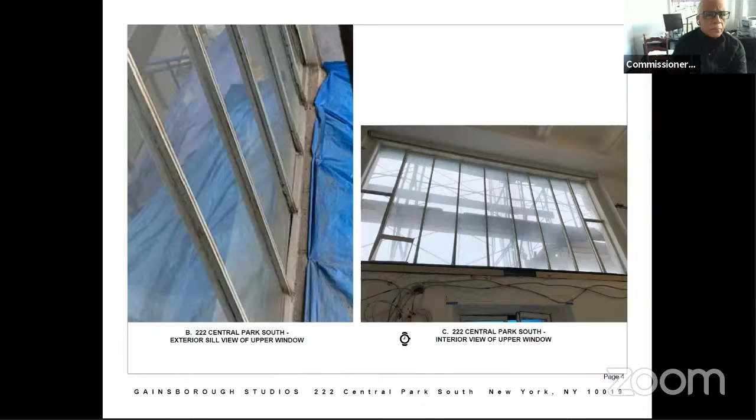I think this is acceptable because it is almost like the existing, enough that from the ground floor we really wouldn't perceive it. And...

Just to clarify, Commissioner, the additional muntin is actually in the base of that one narrow element. Well, there is a muntin where the meeting rail would be, and I think Corey, do you want to elaborate on that, or should we go to the section detail? Move us to the section.

Yeah, if we can go to the section, that's better. But essentially, those two outer panels are currently very narrow double hung sashes within the larger assembly that's otherwise fixed sashes. Because they're unable to find a way to replicate that double hung operation, the applicant's proposing to do it as a full height operable casement, but to add that mullion at the same alignment of where the double hung sashes and meeting rails were, so that its appearance will be somewhat similar, particularly when seen from the street level, although it won't have that change in plane that the double hung windows did.

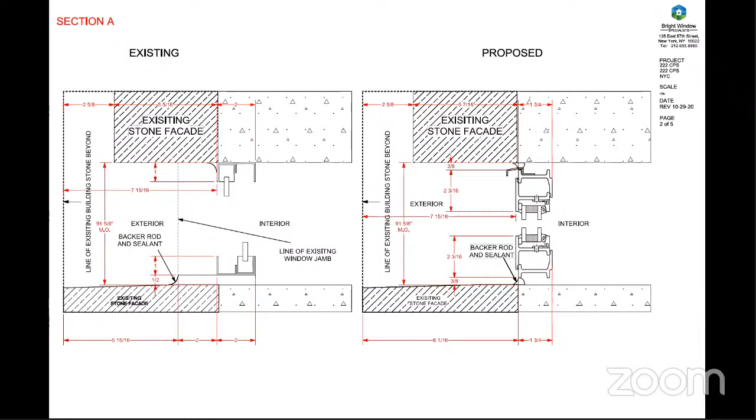And Commissioner Chapin? Yes, I agree. I think that I can support this application as presented. I note that I was going to forget to ask about this, but they did establish a master plan for the rear facade earlier, and I was just curious as to what that was. If the staff could just explain that. But I think this seems like a reasonable approach.

Okay, thank you. So I think the rear facade is not visible and may have been a different window configuration altogether, and the staff can correct me if I'm wrong on that. But I do believe that independent of this application, the building board is considering a master plan, and we may see that in the future. It seems that since they did it in the back, they will probably follow through, which is good. Exactly. So I think they're working on the front.

Okay, Commissioner Goldblum? I agree. Okay, Commissioner Devonshire? I can approve it. Commissioner Chen? Same here. Commissioner Bland? Yes, this is appropriate. Commissioner Lutfy? And I also would encourage the building to do a master plan. And this is a good case study, so. Okay, great. And Commissioner Jefferson? I can approve it. Okay, and sorry, Commissioner Gustafsson, that you were the last, but you can bring it home now. It's appropriate. Thank you. Wow.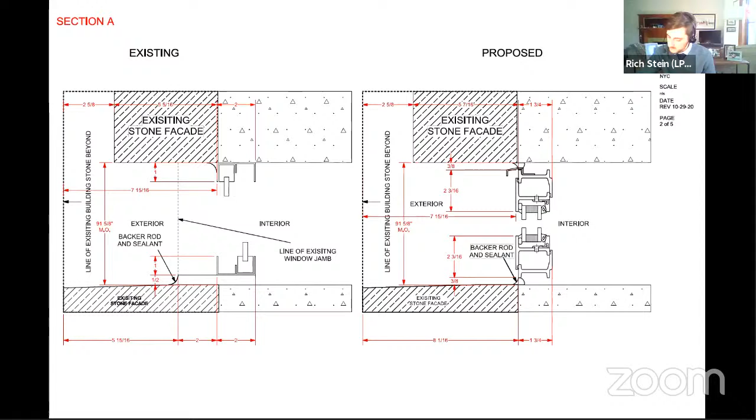Chair Carroll, Aye. Commissioner Bland, Aye. Commissioner Shamir-Baron, Aye. Commissioner Chapin, Aye. Commissioner Chen, Aye. Commissioner Devonshire, Aye. Commissioner Goldblum, Aye. Commissioner Gustafson, Aye. Commissioner Jefferson, Aye. Commissioner Lutfi, Aye. And Commissioner Holford-Smith, Aye. Okay, 11 in favor and unopposed. The motion carries. Okay, so that's approved.

Thank you. And we'll move to the next item. All right, the next item before we break for the lunch break is item number 5. This is LPC 19-4844, an application for a certificate of appropriateness in the Borough of Manhattan, Block 896, Lot 30, 238 East 15th Street in the Stuyvesant Square Historic District. This is an Italianate style house built in 1850, and the application is to construct a rooftop addition and excavate the cellar.

Commissioners, the applicants have joined the hearing. Just giving control of the slides to them.

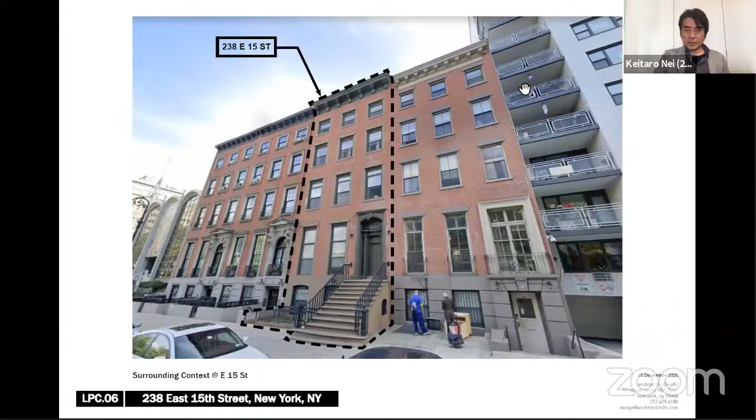Basically, it's 2 rectangular masses clad in zinc. This is the rear facade.

On the rear, we're proposing to excavate partially about 6 feet down a portion of the rear yard, to meet with the cellar space inside.

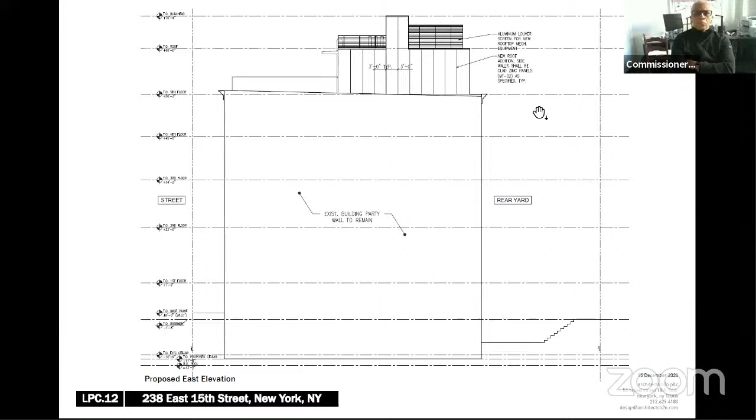In the cellar, we're proposing to excavate the entire cellar down 1 foot, and then we'll have a narrow lap pool excavated another 4 feet. This is the rear yard excavation here.

We're also proposing an elevator pit approximately 4 to 5 feet deep, and this will be the new proposed elevator shaft.

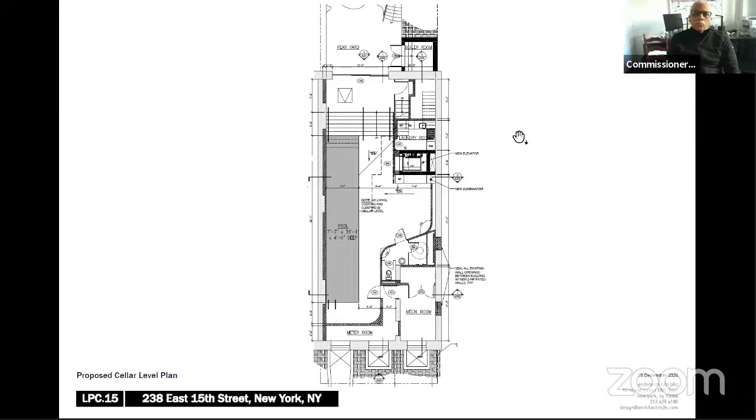And this is the elevator pit that we will be proposing here where the elevator is. Next slide. And this is the rear yard.

There are double height sliding doors that connect the cellar inside to the exterior. This is the area that we propose to excavate, and the excavation is only about 6 feet down, so it's not like a full story.

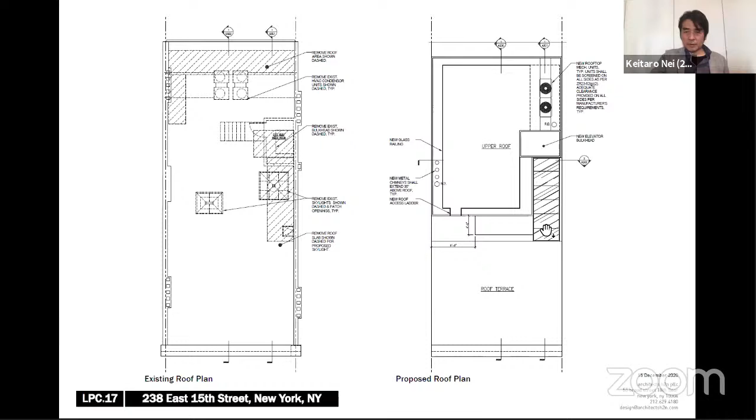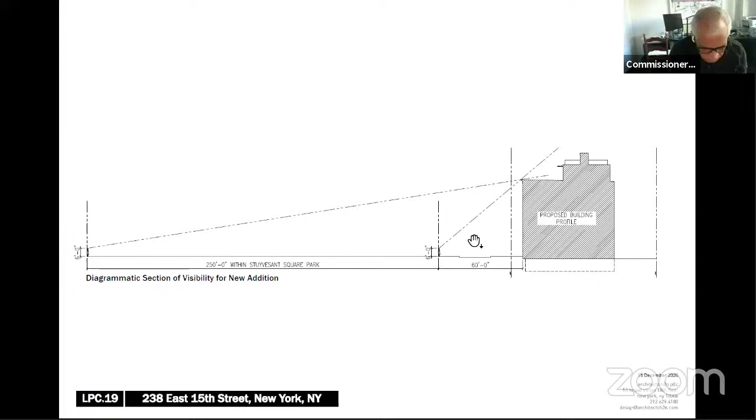This is a section showing the visibility angles. From across the street, our addition is not viewable. However, because of the Stuyvesant Square Park, we will be able to see the roof addition at certain vantage points, and we can go into that a little bit more with our mock-up.

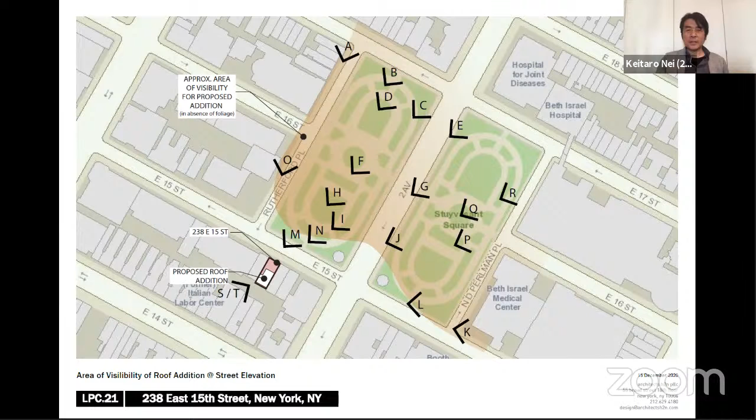This is a visibility diagram. This is our building here. For this diagram, we're going to assume a hypothetical condition that there are no trees in the park. And if there were no trees, this is what we feel would be visible.

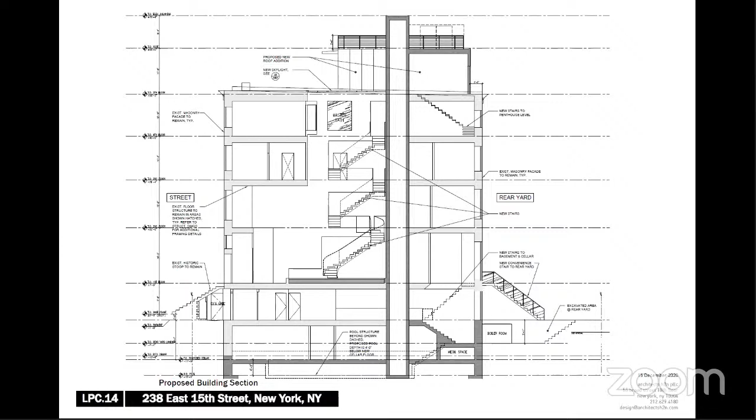So the elevator goes to the new roof penthouse, right? Yes, it will go to the addition, the roof addition, but it won't go to the roof of the roof addition. And this is a single family house, right? Yes, correct. Okay, and what is the interior height of the rooftop addition?

The interior height will vary. It's stepped a little bit, but it's somewhere between 9'4" and 10'4". Thank you.

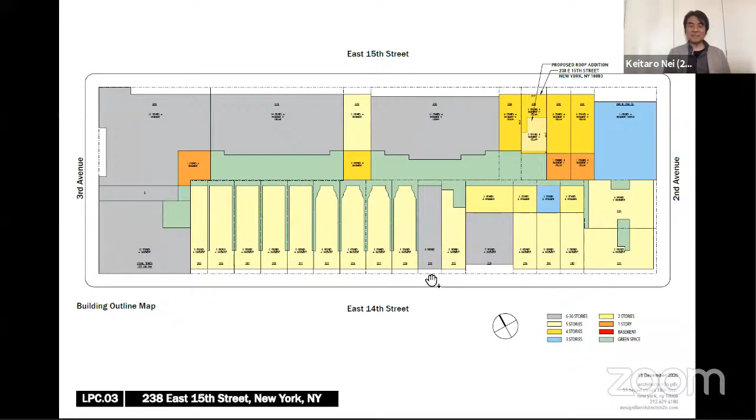So in reality, as one walks through the park, especially with a very mute color palette and very simple form, we don't think people will really notice it - that's our feeling. And I think as the views get closer to the building and really connect with it visually, you're seeing the bulkhead, the elevator bulkhead, more than the addition. Is that right? That's correct.

All right, any final questions, commissioners?

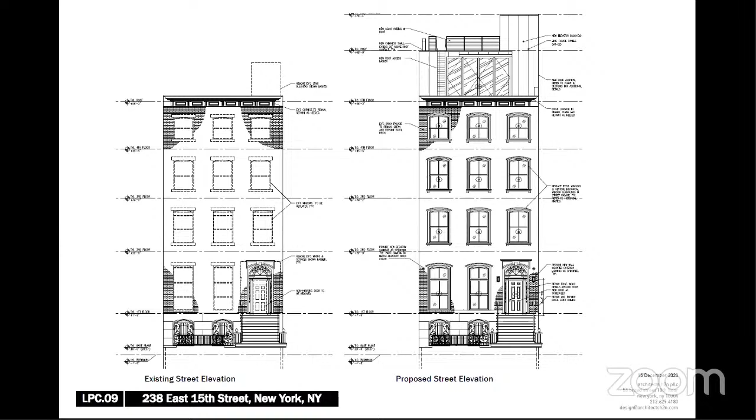Okay, Commissioner Goldblum? I'm waiting for the flamenco concert.

In the meantime, I would agree with my other commissioners about the reductions. I think the interior should be 8 foot at the front and no higher, which would allow for a reduction of probably around 2 to 2.5 feet. It's a significant amount.

If you look at the visibility, much of the visibility of the main portion of the addition was a fairly narrow band at the top, and it looks to me like you could probably eliminate much, if not all, of that. By having the elevator's top stop be at the top floor of the existing building and not going up to the penthouse, that would allow them to drop the top of the elevator shaft to equal or be below the height of the reduced penthouse height.

I think the restoration is great. I think the rear yard excavation and cellar excavations are fine. I think I agree with Anne about the railing. It has to be shown, it has to be specified, and it should not be visible.

I just think the criteria should be very clear for the applicant that if anything is visible from across the street or in connection with the building, as we've discussed, that should be reduced so that it is not visible. The only visibility that would be okay is that from a distance, or that which is disconnected from the main body of the building, and that should be reduced as much as possible.

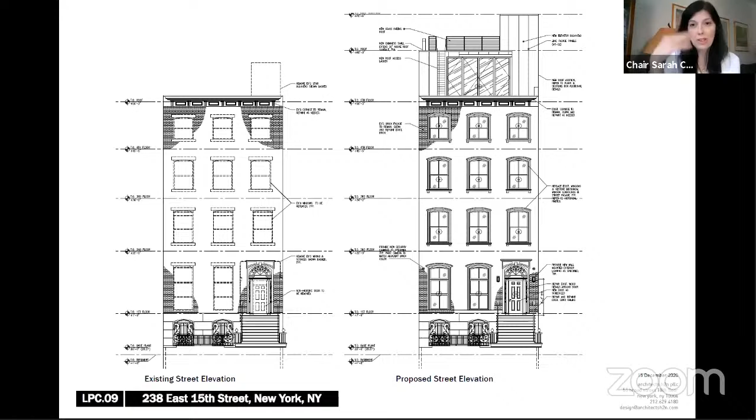Or at least directly from across the street. So I think you should continue to study this. You can explore reducing the floor-to-floor heights. It seems like there's a lot of room to reduce by doing that, as well as perhaps canting it even at that height, and also consider eliminating the stop to the elevator at the rooftop addition, stopping at a floor below in the main building to eliminate that visibility, which I think will really help most of those close-up views.

So where I think now the bulkhead is the only thing that is visible. We'll take no action today, and we'll ask you to make those changes and come back to us with a revised proposal. We'll allow you to think about how to reduce it yourself, and we'll see you back as soon as you're ready. Okay.